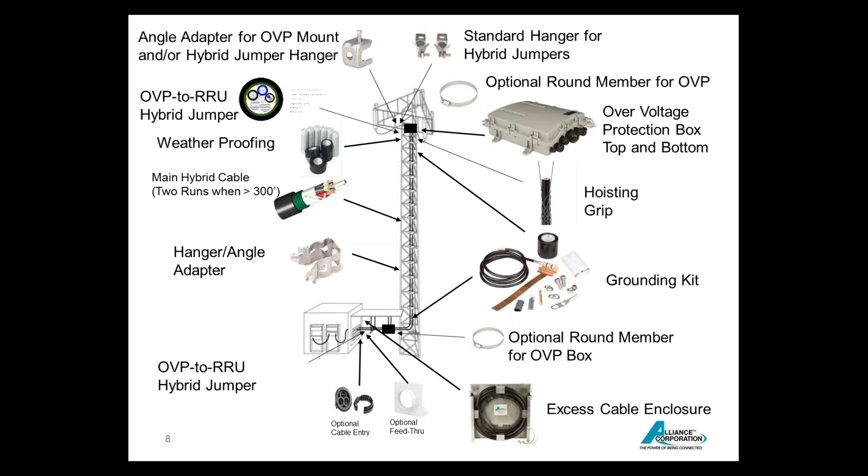And with that, which is a load on the tower, an important part of understanding what your tower needs is cable. This is pretty robust cable that I put up just to indicate the size — it's composite cable that has the coax and also fiber going up the tower. Needless to say, the more runs of cable going up the tower, the bigger the cable, the more robust the tower has to be.

Some of those factors will get involved in looking at that in the next few minutes as well, as to how you actually select the right tower for your application.

So looking at towers — there's a lot of different towers, and people sometimes get confused as to what we're talking about. In the communications area, there are lattice self-support towers. Sometimes people just refer to them as a self-support tower. A lot of people refer to them as a mast — what's the mast you're looking at putting up? And then there are guyed towers.

The question people ask me a lot is, why would one choose one structure over another? First of all, most people building a wireless network want to do it at the most cost-effective price, and generally speaking, the most cost-effective structure is a guyed tower. However, the guyed tower requires land, and land becomes an expense. The guy wires normally go about 70% out of the height of the tower, so if the tower is 100 feet, you have 3 guy points around 70 feet, and that becomes an expense.

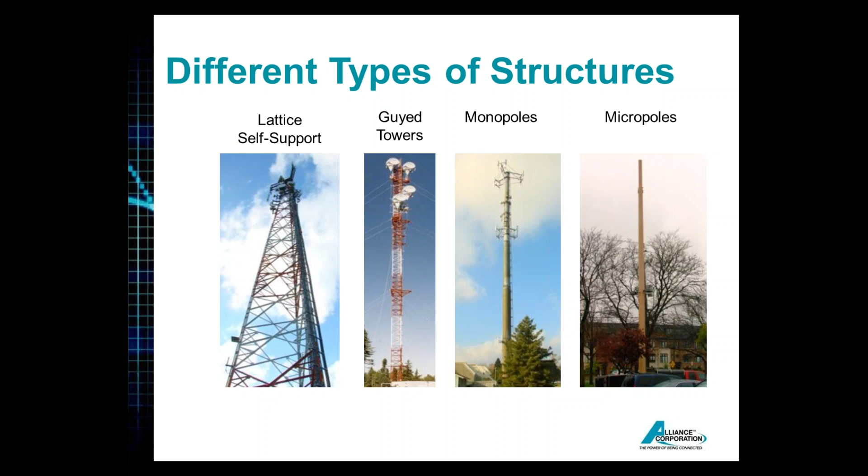But most people we're talking to about off-the-shelf towers, pre-engineered towers, we're talking about smaller towers that achieve the purpose of what the person would like to accomplish. Then there's a break point between what is a custom tower and what is a stock tower or pre-engineered tower.

Generally speaking, a stock tower started off that way. It's there, it's in our warehouse, and Alliance carries certain models of towers off the shelf, which we could ship within a day, or within 3 days, depending upon the requirement, and it could go through a little bit of that as well.

But a cellular tower is usually a big custom tower, and as you choose tower requirements, the more steel you put in a tower, the more cost that tower is. So for a stock tower, getting delivery is usually important. Getting a cost point is important, but it's not generally as competitive as a custom tower, where the big carriers may go out to 3 to 5 different tower companies and solicit quotes.

Back in the heyday, there were like 15 tower manufacturers, and they would solicit quotes. These towers would be engineer designed, which we'll talk about, but getting it down to meeting the requirement the most cost-effective way would usually win you the business. While stock towers tend to work, getting it to market to build your wireless network is really an important factor.

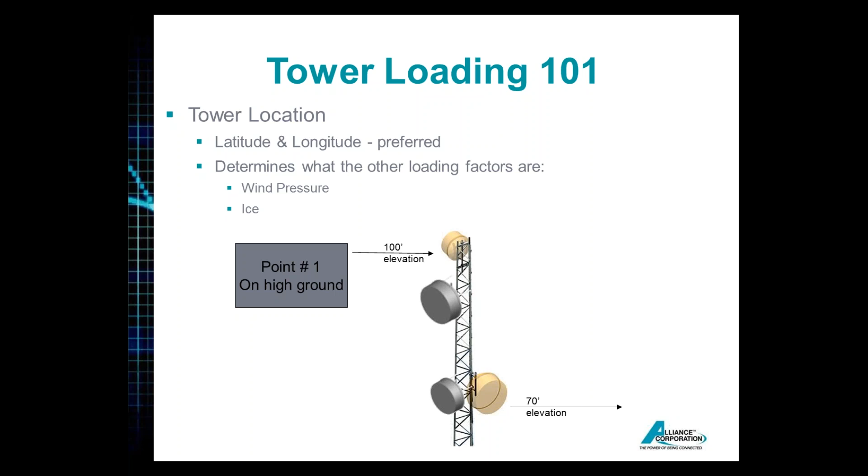The other factor that plays in, depending upon where you are in the country, is ice. The ice factor could be very minimal, or it could be a lot of ice, and that loads down the tower as well.

Jerry, I've just got one question. The question is, who uses survival design? Is it regulated to use survival tower in Canada?

The tower that is available particularly in Canada and in the United States is the Titan Tower, manufactured by Trylon. That tower has been in the marketplace for over 30 years and is still being sold mostly in rural areas. So if you're in a rural area and the municipality is not concerned about that tower collapsing, it's on your farm, you're putting up a network for GPS to control what you're doing on your farm, and all you need is heights up to 96 feet, and the load is very minimal, you could put up a survival tower. So survival towers are still being sold.

It's a nice, fast, low-cost way of getting a structure in place that is not mission critical. If it's a critical operation, police, fire, even WISPs - though WISPs used to go with a lot of Titan towers because they're very economic to put up initially - but if they start getting doctors on the network, then they have to go with a more robust type of tower to ensure it doesn't come down in times of emergency.

Thanks, Jerry. So we have a questionnaire that starts telling you a little bit more information about what's required associated with it. It's very simple overall. It's basically the things that I stated - who you are, where's the site information, what's the application - as a general guideline.

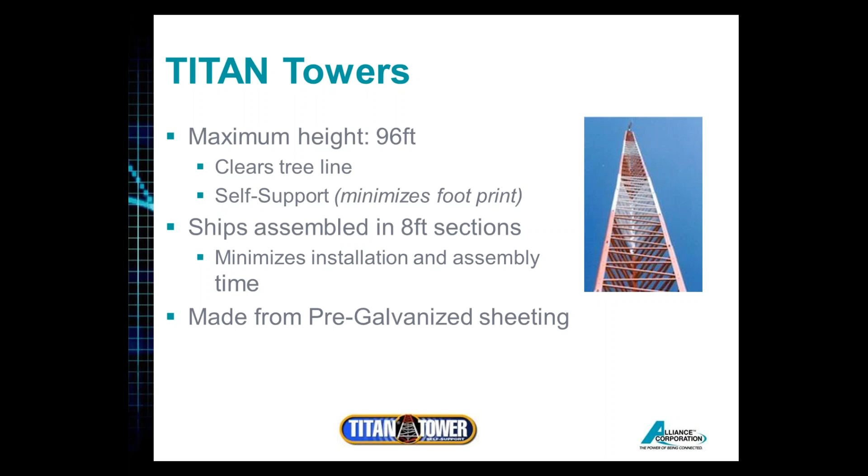This tower could go up to 96 feet. It's built in 8-foot sections and made out of pre-galvanized sheeting, versus pretty well all the other towers in the marketplace, which are hot dip galvanized towers - more structurally stronger, but way more expensive as well. So this is that survival tower we just talked about.

It has no ability to be stamped. The picture you're looking at there is one of a 96-foot assembled tower. It's assembled in the 8-foot sections, but then the installer has to stack that tower as well, so there's costs associated with that.

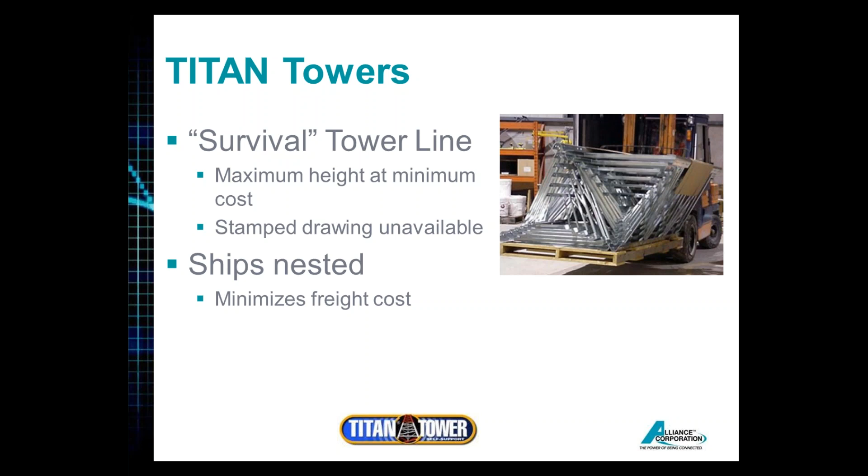There's accessories, and I'm not going to go through all of them, but every tower has a full line of accessories. The accessories are also very specific to the tower, very specific to the wind, the ice rating associated with it, and even the weight of the various antennas going on there.

The next tower up from the Titan in the Trylon line is the Super Titan Knockdown. That tower could also be assembled, but usually only assembled in the factory in 10-foot sections up to 120 feet, or 12 sections for the bottom sections. Above that, you have to get that tower in knockdown form. This tower has the capability of going up to 190 feet.

But the thing with towers - they're sort of building blocks, like a Lego set. If you don't need a lot of load, you could take the top sections of the tower and build a tower with, say, the top 10 sections, which could be 100 feet, or take the bottom 10 sections and have a very robust tower at 100 feet, or take various sections along the way. That's the same with the Titan and just about every other tower manufacturer, to some extent, because ultimately the towers have to be fixed at the top and secured at the bottom with a foundation.

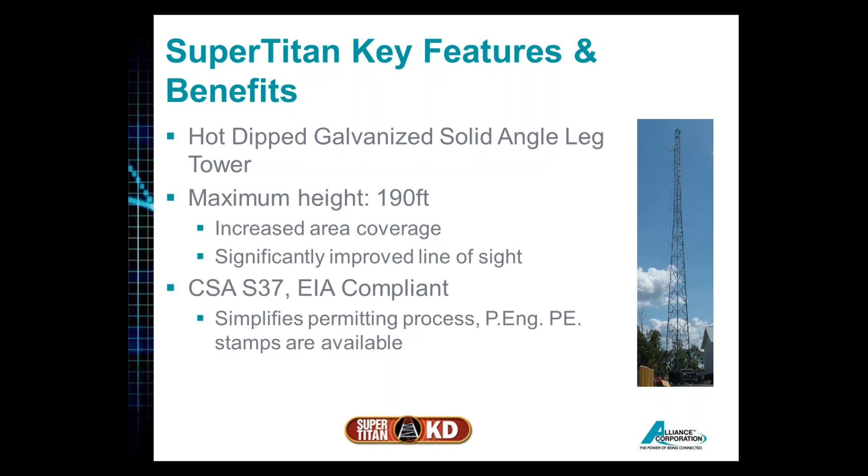That is where a lot of people seem to get confused. They say, well, that's a certifiable tower, so that's what I want to buy. But it's not, if you don't have all those parameters defined - exactly where the site is, all the information I've been talking about. Those factors are critical before an engineer anywhere in Canada or the United States will certify that tower as meeting those requirements.

Every tower out there requires some sort of foundation in place. There's a lot of variables that go into choosing the foundation, and that a lot of times is determined by the geotechnical report. If you're on a rock foundation versus a sandy soil, the foundations have to change.

Foundations are an integral part of a tower. In some places of the country, you need to put piles in and weld the base section onto the piles. So there's a little bit of work required in determining the type of foundation. However, the majority of towers going into good soil conditions are, as I said, easy to install.

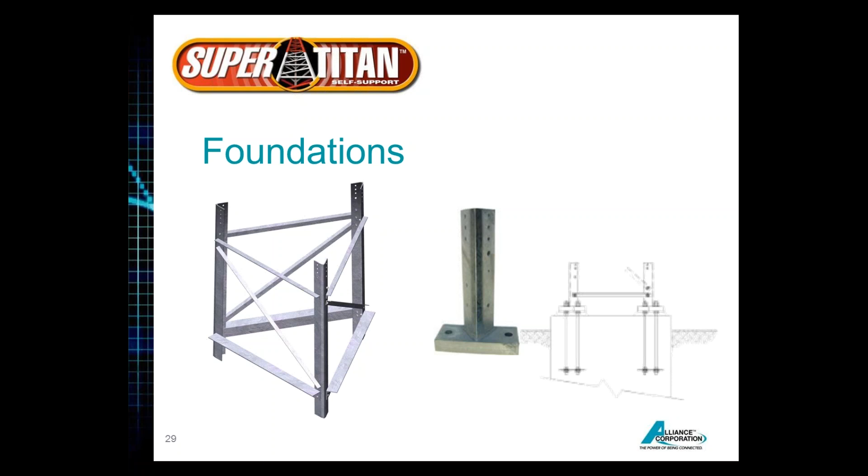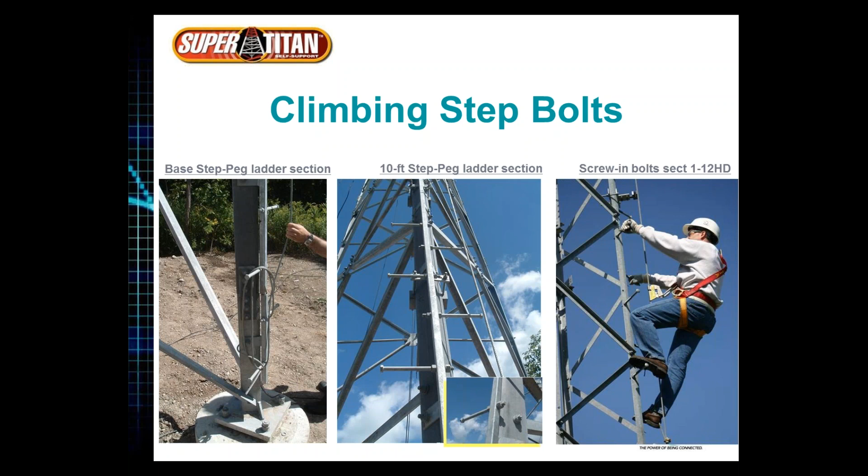So applications are plentiful. I started to talk about emergency services, SCADA services, broadband services. There's ongoing applications for towers, and the towers have to be selected based on the factors I was indicating.

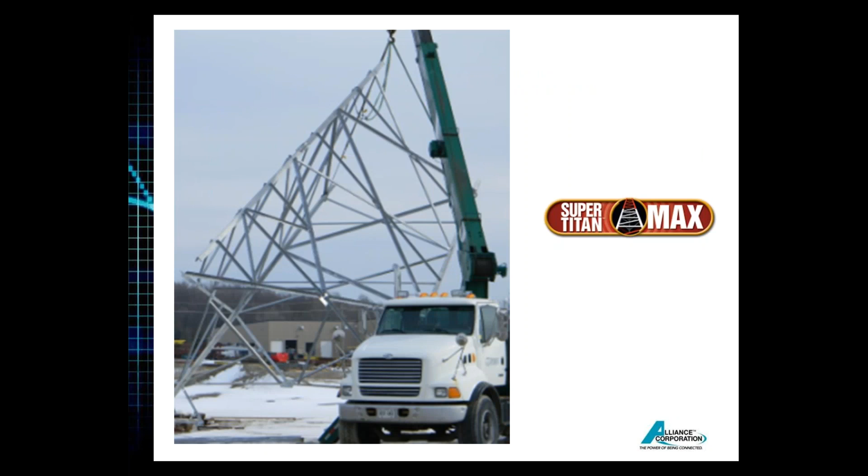When you get into bigger towers, Trylon offers their Super Titan Max. Now you might ask, is that really an off-the-shelf tower, since it's manufactured in 19-foot sections and could go up to 251 feet? The reason it's classified back into the off-the-shelf category is that it's totally pre-engineered. All the drawings are available, and the lead time to get a quote is usually a couple of days, with the lead time to get the tower out usually no more than 2 to 3 weeks.

Therefore, it's still classified as a fast service tower versus a custom designed cellular tower, which could take 2 to 4 weeks for the engineering to be done, and then another 4 to 6 or 8 weeks, depending upon the factory load, for a custom tower to be delivered. This tower, like the Super Titan, could be PE stamped, P.Eng stamped as well.

For faster installation applications, most companies have an all-weld form of tower. Here from Trylon is a Super Titan all-weld. This tower goes up to 150 feet, but again, it's building blocks. So if you need a 100-foot tower, depending upon the load requirement, you could take the top sections, the middle sections, the bottom section, and the tower ends up being a little bit more costly, but there are installation factors that really save money as well.

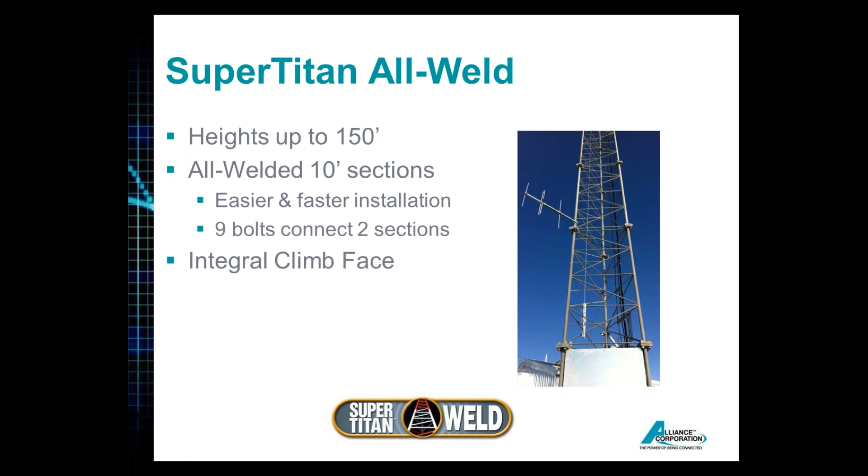Some of the advantages of an all-weld tower: it's really easy to put together, has fewer parts, and eliminates the ladder and transmission line supports. But the trade-off is that when shipping this tower, from a freight point of view, you incur more cost. You're essentially paying to ship air, since it takes more room on a flatbed to get the tower from point A to point B.

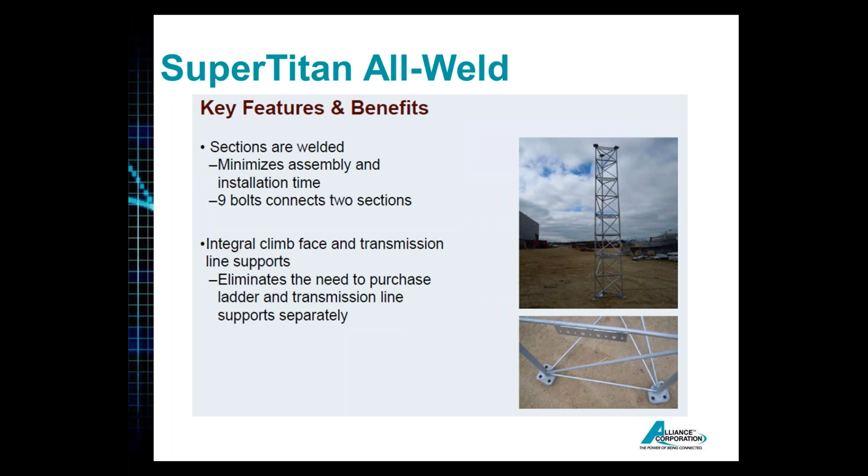Then getting into another form of tower, there are guyed towers. Trylon offers the STG, which could be a guyed tower, a smaller self-support tower, or a bracketed tower from this same product line. This product is all welded together, bolted together, and has solid round legs.

As I get into some of the other products, I'll point out some of the structural differences between one tower manufactured by one company and another by another company, and I'll tell you some of the advantages or potential disadvantages.

This STG is all solid round, which eliminates the potential for internal corrosion inside a member. It's very durable, easy to transport in 20-foot sections, and bolts together with 3 bolts.

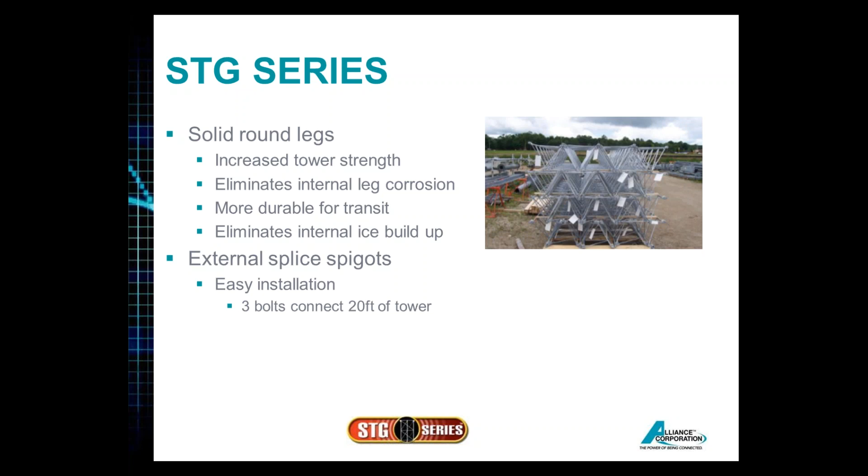So it has an integral climbing face. It's non-tapered, it goes up straight. It's been in the marketplace for at least 20 years now, and it's a good tower.

And then there's rooftops, and I'm not really going to go into a lot on rooftops today because that's a whole separate discussion that could be a webinar by itself. There's a lot of different products out there. However, the only thing I want to say about rooftops is a cautionary note: it's not easy to just go on anybody's roof. You could get up there, but if you cause damage to the roof, you may have a serious problem. So always be cautious as to when you want to go on a roof, what the roof is consisting of, if you need to get an architectural approval associated with that.

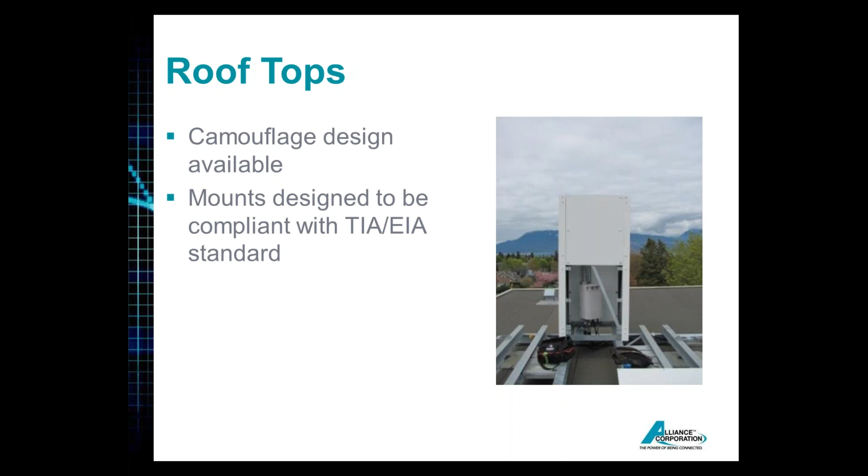Fall arrests are really important. Alliance is a member of NATE, and a member in Canada of STAC. I've been involved with NATE for over 20 years, and STAC since it started in Canada the last 3 years. I highly recommend, in all cases, everybody follow the guidelines of these associations and the government standards. The highest fatality and injury rate, unfortunately, is in the tower industry, particularly in the United States, so attention to safety is really, really important.

So now, I went through a lot of towers on the Trylon side, and I just want to go through a few on the Sabre side now as well.

Sabre offers the LDA tower up to 150 feet. This tower is very similar to Trylon's Super Titan Knockdown. The Super Titan Knockdown from Trylon could go up to 190 feet, but generally isn't sold at that level - usually up to 120, 130 feet, which the LDA tower also meets. The design of that tower is very similar - they're both angled legs with angle bracing, considered lightweight towers, and sold a lot through distribution both in Canada and the United States. A very reliable tower, very similar, and the choice between this one and Trylon, and Rohn which offers a very similar tower, really comes down to your location and cost of freight getting it to you, or familiarity with the tower itself.

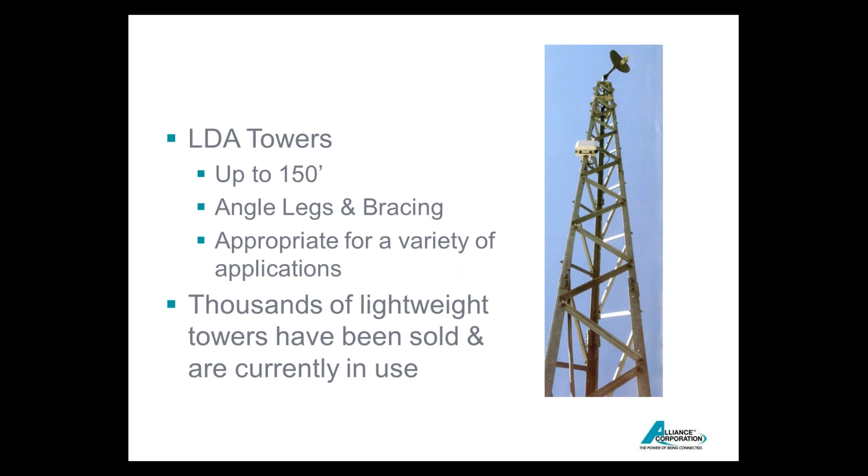Now, the question that people ask is whether there's really a difference in the quality of the tower, the longevity of the tower, off the type of material it's made from. The reality is, if you're going to have an engineered tower stamped by an engineer, that tower - be it a Trylon, Rohn, or Sabre - is going to meet that application. So it becomes, at that time, a question of what's the cost point, what's the cost of freight, and the ability of the installer to put it up. The only difference between tubular, solid round, and angle bracing is preference.

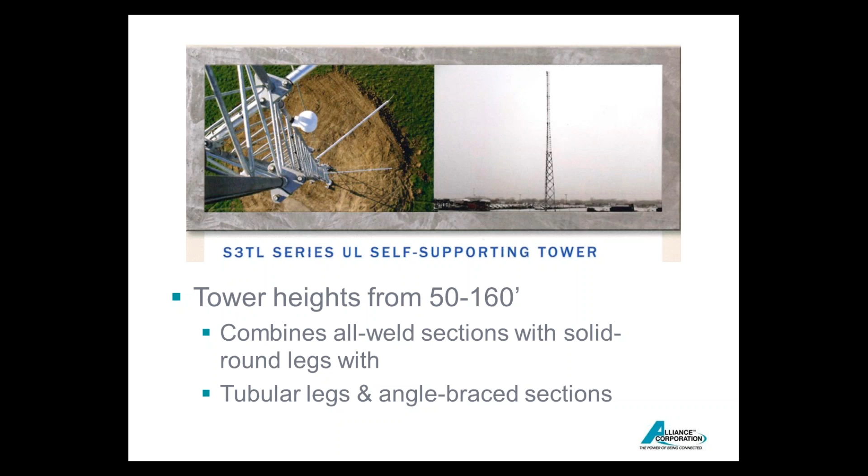In Canada, there's a strong preference for angled leg towers. They're not as efficient as a round member tower in terms of design, but there's the ability to always see if there's any corrosion. Years and years ago, when the galvanizing process and baths weren't as good as they are now, there was always the concern whether the galvanizing would properly coat the tube legs and avoid corrosion inside that pipe. In the United States particularly, there are a lot of tube towers - Rohn, which has been one of the biggest manufacturers, predominantly uses a lot of tube legs. There's a lot of that out there, and those towers have done exceptionally well and still work very well. So that's kind of where you start seeing a mix, as different companies, in order to get cost competitive, use different technologies and different materials to make sure their tower meets the engineering standard it's designed for, while trying to do that in the most cost-effective way and manner.

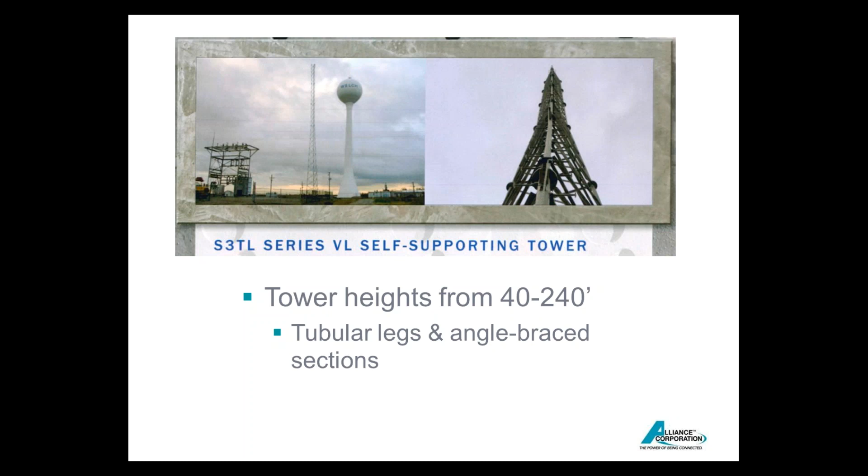And then Sabre, in their self-support area, has what they call their S3TL series VL, which goes up to 240 feet. This is now tubular legs and angle bracing sections - a combination, as you just saw, of what makes the most cost-effective quality tower for that particular company. Looking at one of the very successful products from Sabre is their 1800 series tower.

This is very similar to the SDG, which is also an 18-inch face tower, very similar in capacity and design, and ability to be used as a short tower, as a self-support 50, 60 feet, bracketed to a house or building, or as a guyed tower. Very similar there, similar to Rohn towers, the 55, 65G series as well.

Now here we have Rohn, which similarly has a lot of self-support towers, guyed towers. They do really well in telescoping mast rooftops, tapered poles. So when we look at Rohn, their G series structure, they dominate what's called the 25G, which is a 10-foot, very lightweight tower, goes up in 10-foot sections, good for 10 feet to 60 feet, depending on the wind location.

Moving up from the 25G, there's a 45G, 55, 65. So they have a whole series of products that are really guyed design, but with the ability to be bracketed and in small capacities as a self-supporting tower. So in the bigger combinations, like the 55-65, it's like the Trylon SDG, the Sabre 1800. And again, proximity to market, what your requirement is, will help determine which of these products are required.

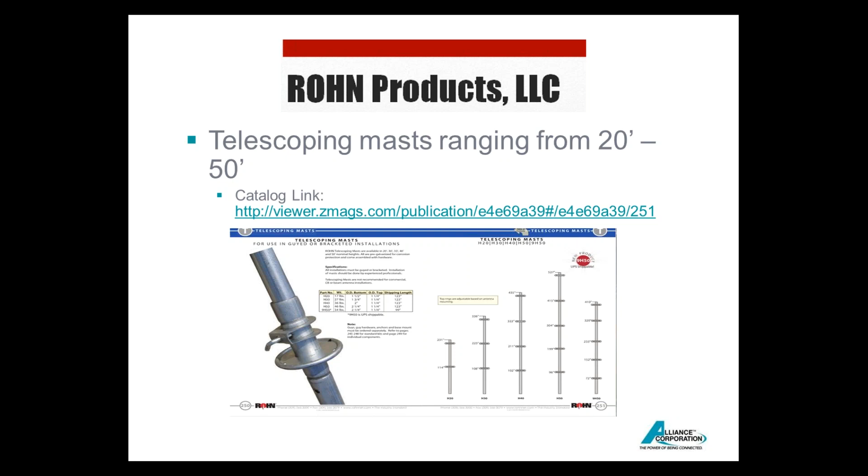So the guyed tower, as I said earlier, big guyed towers as well, which could be very fast designed from off-the-shelf requirements. Telescoping masts, 20 feet to 50 feet. This has been for very low cost, let's get something up in the market. Usually not really designed for any type of antenna load. Some of these telescopic masts can also be guyed down to give you a little bit more sturdiness.

A full range of non-penetrating roof mounts, penetrating roof mounts, wall mounts. Similarly, from all the other manufacturers, we have the ability to provide those types of products, and they vary a little bit based on what the actual requirement is. Rohn similarly offers a lot of different poles, embedded poles, monopoles, and full custom design ones.

So when we say off-the-shelf towers, there are some that are truly off-the-shelf, but more indicative to where a distributor like Alliance gets involved is for fast delivery, meeting a combination of requirements that are not fully cellular tower, heavy load tower requirements. So that's kind of where we fit in, and where most of the products I talked about fit in as well.

Unfortunately, there are no sky hooks up there. I wish there were, and maybe I don't, because I wouldn't have a job. But ultimately, to make communications happen, you've got to get the height. So my role here at Alliance is to provide assistance to our account managers and our customers to ensure we select the best tower for their application, and the most cost-effective tower, with the widest range of products available. As a professional engineer, I always make sure we're not going to get caught short, that the tower is fully applicable for the application, and that the customer is going to be happy with the installer.